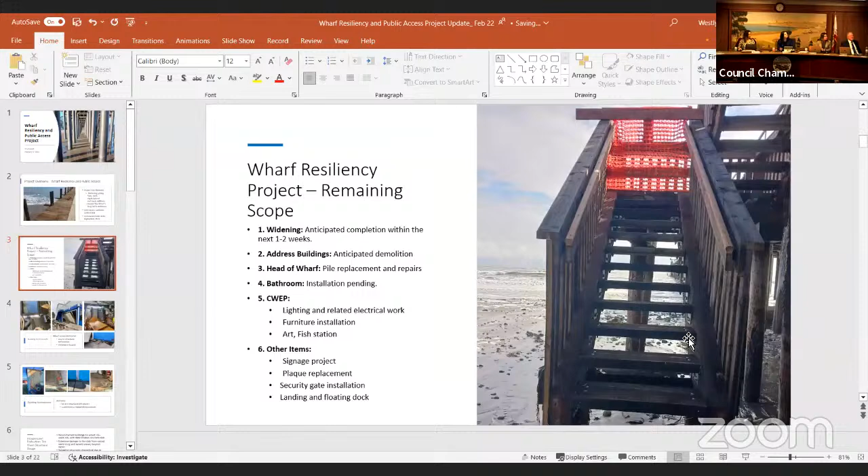Joys of technology. I'm sorry, no worries. Yeah, sorry. Okay. How do we get rid of the notes?

Okay, good evening, Mayor and Council members. Update on the Wharf Resiliency and Public Access Project post our community meeting yesterday. Next slide, please. If anyone needs a reminder, the key project elements of the Wharf Resiliency and Public Access Project is to widen the wharf to be more resilient, fix some deferred maintenance, add a restroom, ensure the wharf's long-term resilience, and to do repairs from the January, now December 2023 storms. Cushman Contracting has been on the job since September 2023 and is working diligently to complete this project within the calendar year. Slide.

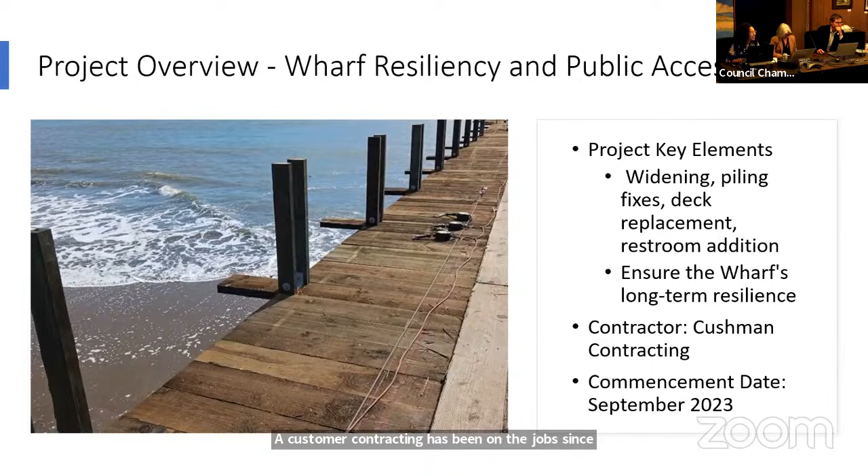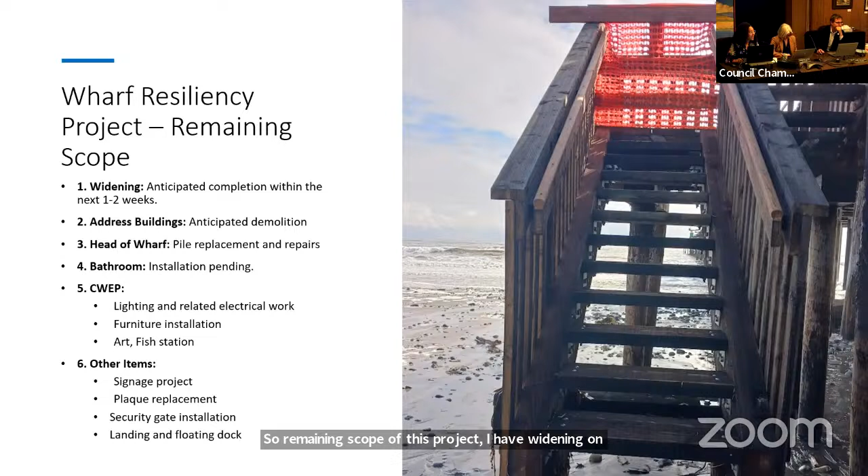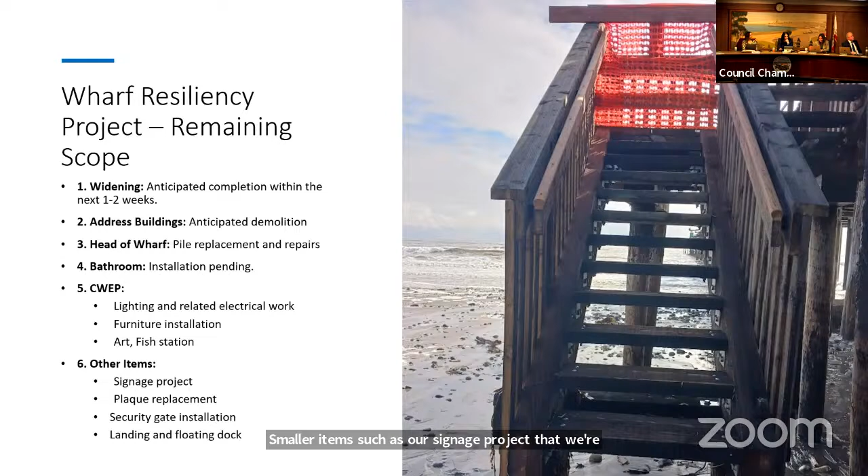So the remaining scope of this project includes widening, but actually I was informed that the widening was completed today, so that's one box to check off. The other remaining items in scope are to address the buildings, which is the bulk of our conversation this evening, but also to complete repairs to the head of the wharf, discuss the bathroom installation there, the Portland Loo, items from the Capitola Wharf Enhancement Project, and other smaller items such as our signage project, replacing plaques, putting in the security gate, and addressing the landing and floating docks.

As reported two weeks ago at council, the Wharf House restaurant has severe structural deficiencies, and we discussed how this building needed to be demolished because it's an imminent safety hazard.

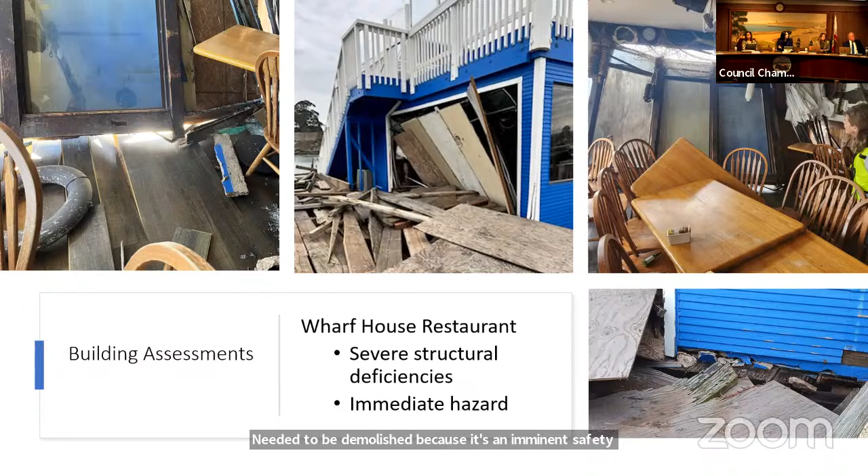What we did not discuss in detail two weeks ago, because we did not quite have the assessment completed, was the boat and bait shop, which also has severe structural deficiencies. That was assessed by myself and our building official, but also confirmed by an independent engineer at the port.

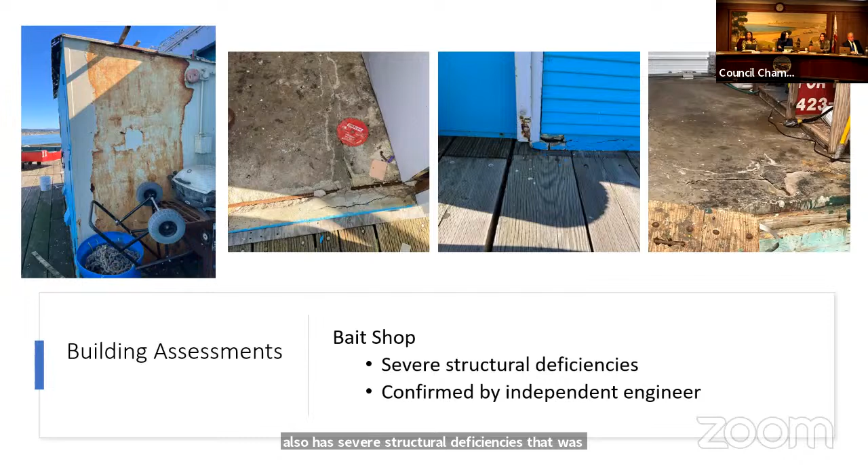Here are our findings. Mr. Tim Wann is in the audience this evening, and I'd like to invite him up to speak to these findings about these buildings.

Hello everyone, welcome, thank you for being here. Can everybody hear me? Okay. My name's Tim Wann, and I'm a registered civil engineer. I practice structural design independently, and I've been involved with the city of Capitola in terms of repairs on the Esplanade starting in the storms of 2008 and the more recent storms as well. So I've got some experience with wave action and damage, and trying to keep those structures serviceable.

I was asked to evaluate the boat and bait shop and take a general look at the structures out on the wharf. On the way out there, I noticed the wharf is coming together really well—it's looking great. That's an important element for any structure: having a good wharf supporting it.

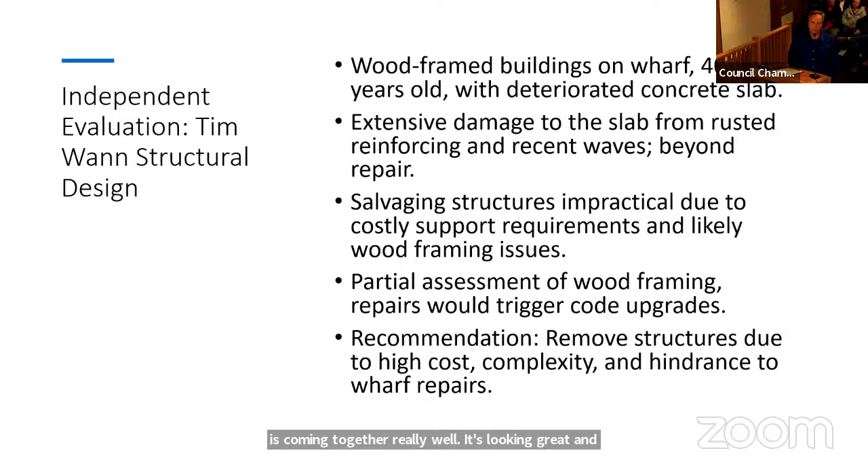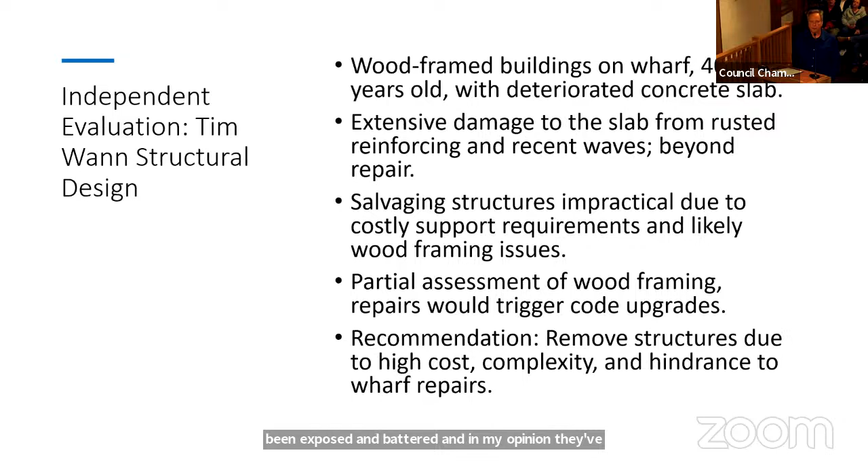Upon looking at the structures, they're roughly 40 years old, and they've stood the test of time, but they've been exposed and battered. In my opinion, they've reached the extent of their service life. What it would take to repair them would be more costly and cumbersome, and I think you'd be left with an inferior product at the end of the day, versus just moving forward and having better access to continue repairs on the wharf and starting a better structure on top of it.

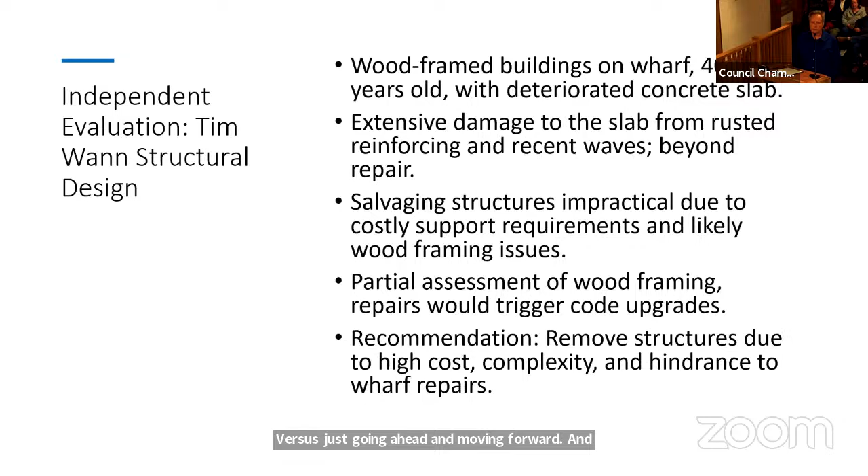Any questions at this point in the presentation? Or do you want to wait until the end? Okay, we'll wait until the end. Thank you so much.

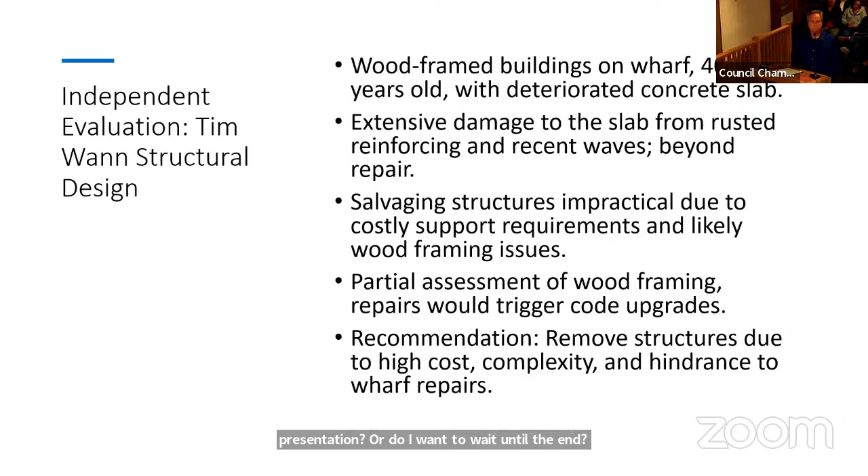As you know, yesterday we had a town hall that was very heavily attended. Some of the main takeaways were the support of the businesses and encouraging their tenancy out on the wharf, and also questions regarding the demolition of the buildings and the financial stability, disposition, and implications. So we're going to get into that in the next few slides.

One of the big questions that came up prior to the meeting, and at the meeting, was what are the chances we can preserve these buildings where they are now in the same structures? Really, that isn't feasible—they would need extensive repairs. Obviously the inside wall of the Wharf House is completely collapsed. For the boat and bait shop, the repair would involve lifting the building and working underneath it, and while that's feasible, it's not practical. We'd also have to address a bunch of compliance issues—there are hazardous materials concerns out there, so it's not really practical, and to Mr. Wann's point, it's not financially reasonable either.

So the demolition process is actually quite complicated due to the age of the buildings and where they're located. The first step would be to remove the contents. We're working with both tenants on this. For the Wharf House, it's not really safe to go into that building, so we're working on getting a third party to retrieve those items.

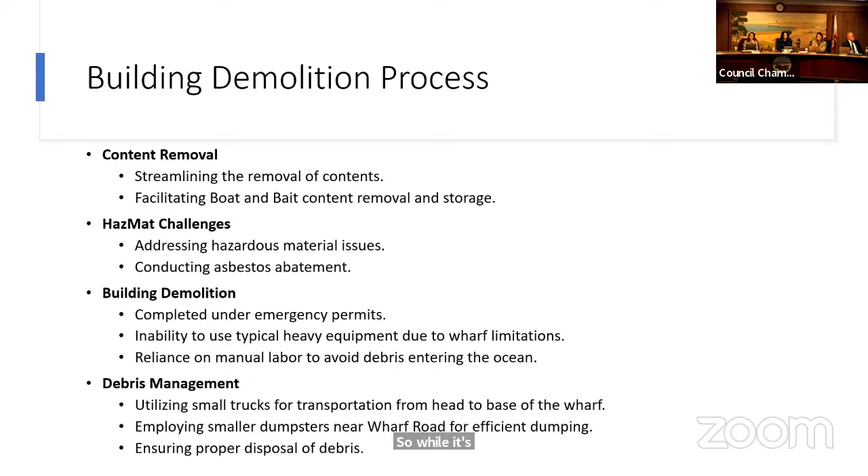Next slide, please. So there are a few different approaches we can take with this project. The first, recommended by staff, is to do this within the resiliency project. We're currently obtaining emergency permits, and we can do that because we intend on doing this in the short term. If you wait longer, you can't get them — you have to get regular permits.

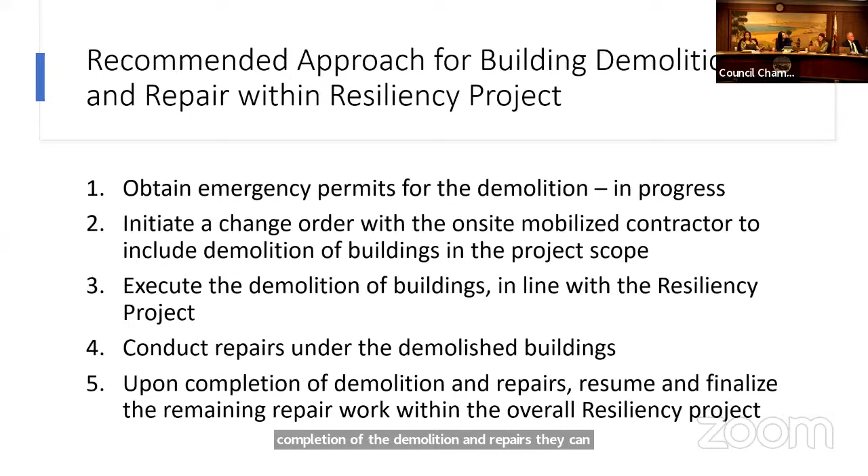The idea would be to initiate a change order with Cushman. They're on site, they're mobilized, they have the equipment and skills to do this type of work. They would execute the demolition of the buildings — demolition being all those steps we just discussed — and it'd be in line with the resiliency project. They'd be able to keep moving forward with other items already in their scope of work while doing this demolition. Upon completion of the demolition and repairs, they can resume full work and complete the overall resiliency project. The estimated additional time for that would be 6 to 8 weeks to the total resiliency project.

Next slide. So an alternative approach would be to engage another contractor within the resiliency project. This also has many steps — I can go over these in more detail if you'd like, but briefly, it would cease Cushman's work, which would incur costs. We owe Cushman under our contract for any delay in their work — we owe them money, which makes sense, since they still have their overhead. We would have to obtain new bids to cover all of the things included in that demolition list.

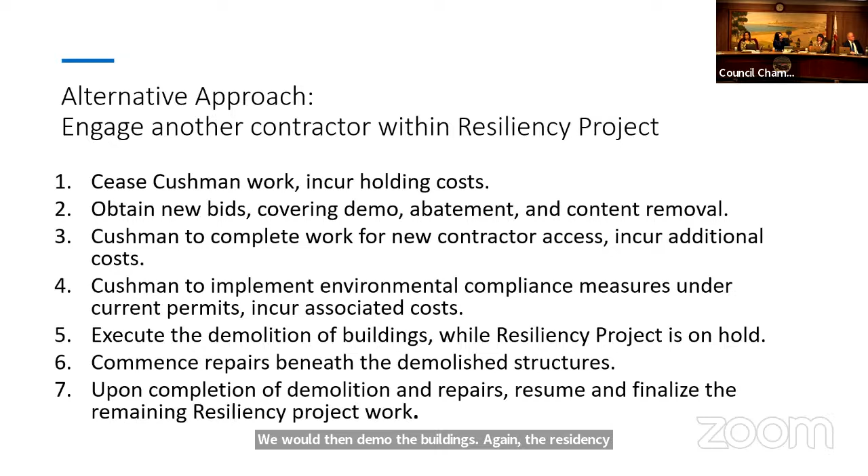Cushman would also be obligated to complete work so that the new contractor has access out to the buildings, which would also be at a cost. Cushman would also be on the hook for continuing to implement their environmental compliance, which we have with multiple permits on this project — also at a cost. We would then demo the buildings, and again, the resiliency project would be on hold. Then Cushman would come back, do the repairs under the buildings, and resume the project after that demolition.

Next slide. The third and least attractive approach would be to defer the demolition until the end of the project. What that really does is give us an incomplete resiliency project, because we would not be able to get to the head of the wharf, since that wharf house building is dangerous to work around. So they would have to stop the project short of the wharf house restaurant.

So what Cushman would need to do is shore up that building as much as they could, so it's not as much of an immediate hazard. Then, with partial completion of the project, they would demobilize, we would close out our contract with Cushman, and we'd need new engineered plans and new permits, because it's no longer considered an emergency since we shored up the building. We'd take it out to bid, mobilize a whole new contractor with a new contract, and work under our new permit conditions.

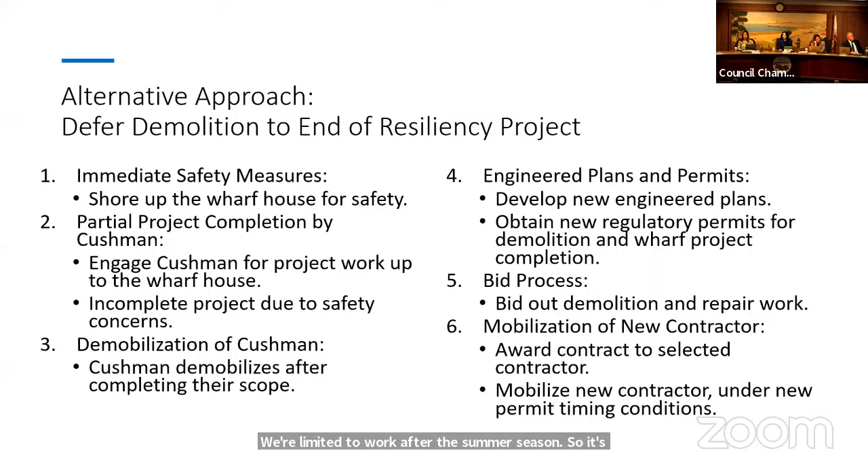And just as a reminder, when we originally permitted this project back before January 2023, we were limited to working after the summer season. So it's likely that we wouldn't be able to do this work until October if we went this route. Next slide, please.

Other parts of the wharf that need to be completed are head of wharf repairs. We had damage in January, again in December. We had always planned on replacing all of the decking, but there are additional piles and structural elements that were damaged in both the January and December storms. Also, the landing, which connects the floating dock back up to the wharf, has deteriorated significantly, which necessitates significant repair.

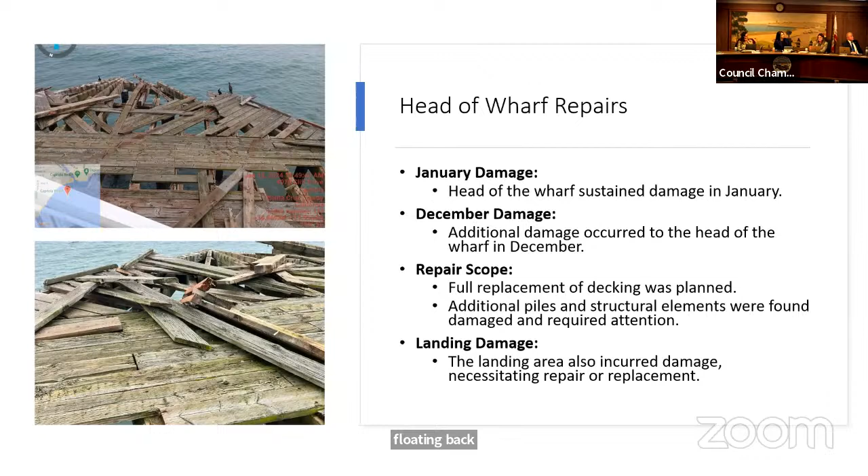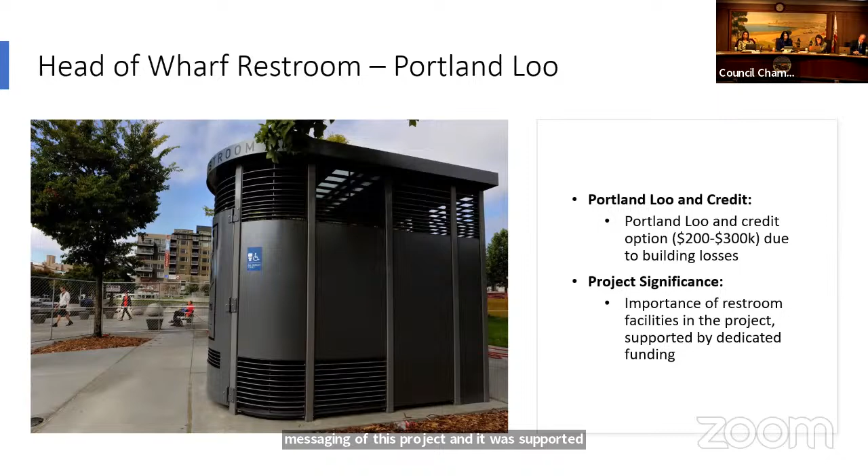Other items in Cushman's scope right now include installation of the Portland Loo. This is a small single-user restroom out on the head of the wharf. It was meant to be in between the two buildings. Assuming we demo these two buildings, it would become a floating restroom. There's a potential to get a credit for this if we do not install it, though it would not be the full credit for the bid item since there's a restocking fee from the manufacturer. There was also importance placed on providing these facilities throughout the messaging of this project, supported by dedicated funding which we could repurpose elsewhere, but it's something the community considered significant.

Other items to be completed are all those in the Capitola Wharf Enhancement Project. That project's specifics are scheduled for consideration by Planning Commission in March. Staff proposes integrating the electrical and furniture components into the Cushman contract because those are types of work they're already contracted to do. That's included in the change order proposed for your consideration tonight. Other elements, such as artistic elements and the fish station, are under separate development and not part of this conversation this evening.

Additional efforts, as I said before, we have a grant. I'm not sure we've talked about this in council, but we did get a grant from the Marine Sanctuary Foundation for educational signage, so we're starting that project. There's also plaque replacement, the floating dock, and the security gate that has been fabricated. All of those things still need to be completed by Cushman prior to the end of this project.

So, the money. This is our proposed change order. I wanted to start from the very beginning: we started off well below our estimated budget of $8.9 million. With these projects it's very common to have change orders, especially considering the storm damage from January, which was evaluated but couldn't be fully assessed until the decking was removed. The first three change orders were nothing out of the ordinary for a project of this size and scope. The fourth change order was for the storm damage from December of 2023. Our current contract stands at $8.3 million.

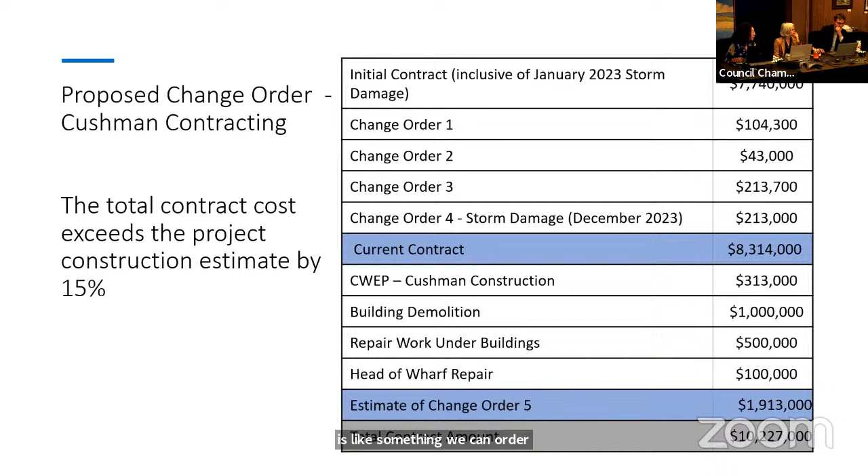They also have to be ordered. You have to schedule the delivery. You have to store them somewhere. You have to assemble them and install them. So that all comes at a cost that probably is not the best use of funds and time of our crew, and so that would be a separate contract that we would bid.

And that would definitely need to be a project that follows this resiliency project. I think in our last meeting when CWEP presented, they were clear that once the money came to us, we were going to be able to complete this project at council's discretion with some input from them. And hearing from staff, this seems like the most pragmatic approach to using the dollars at this time.

For tonight, I guess my last point is if we move forward with CWEP, Cushman Construction, repair work under the buildings and head of wharf repair, we can make that particular motion today and just table the building demolition to the special meeting on Tuesday. Does that sound right based off of what's on the agenda tonight?

Yes, I just think that would result in an additional change order for Cushman later, because we could do this change order for those items, but then with the demolition there would still be cost incurred either way, whether Cushman does it or we do an additional change. And it's just a few days. I guess that's just on Tuesday.

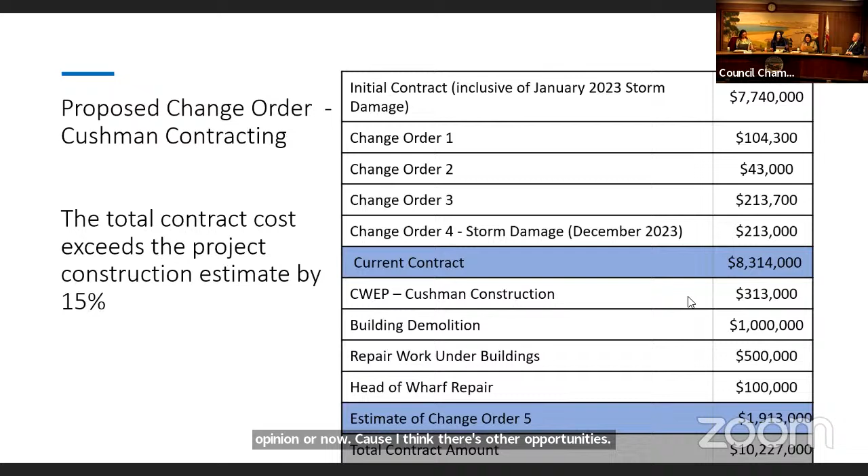I do think it's important that we prove to our community that we're doing our due diligence by getting additional bids. But I really don't want to hold up the opportunity for our business owners to work with the city and the community in finding ways to get some kind of temporary facility out there while we're continuing the long-term planning for facilities on the wharf. So Tuesday would be as long as I want to push it. If we can do a special meeting on Tuesday, I'm okay with that, and if we could just continue to try to get bids.

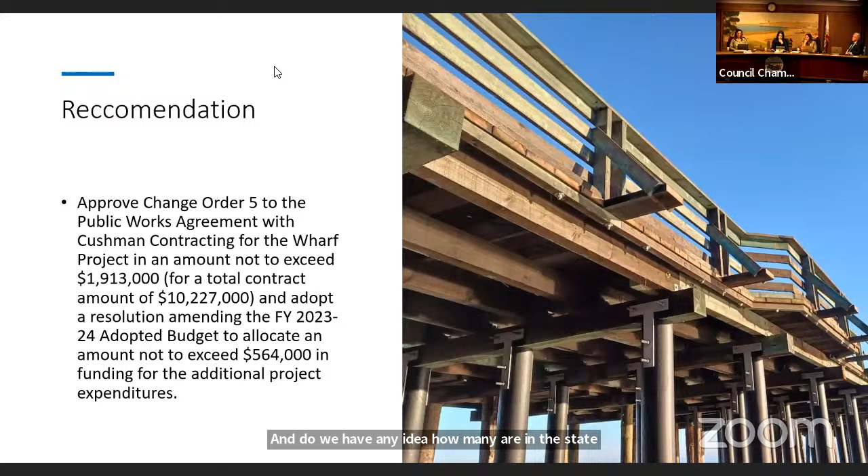I was just curious. I just want to point out, and while I'm speaking, sorry Austin, I was just about to ask you to pull up a slide. Will you pull up that slide that had the next step summary slide? It was for our deliberation. And in the meantime, I really want to take a moment to point out that grant we got for the educational signs, that our vice mayor fought very hard to get, and credit is due in that regard. That's the one, okay.

I am happy with moving forward with a special meeting on Tuesday to further consider any grants, to further consider any bids that were received, and to additionally consider the bid that we have from Cushman.

Council, if you're okay with it, let's save the rest of these items until Tuesday, including the bathroom item. I will say, if you are leaning towards not installing the bathroom, the sooner we let the manufacturer know, the better.

So then we'll start by entertaining a motion. City manager, just one detail I want the council to be aware of: our public works director has another public meeting that evening for the Cliff Drive project, so you'll be getting your city manager pretending to be a public works director, presenting the information. I trust her ability to train me on the right things to say.

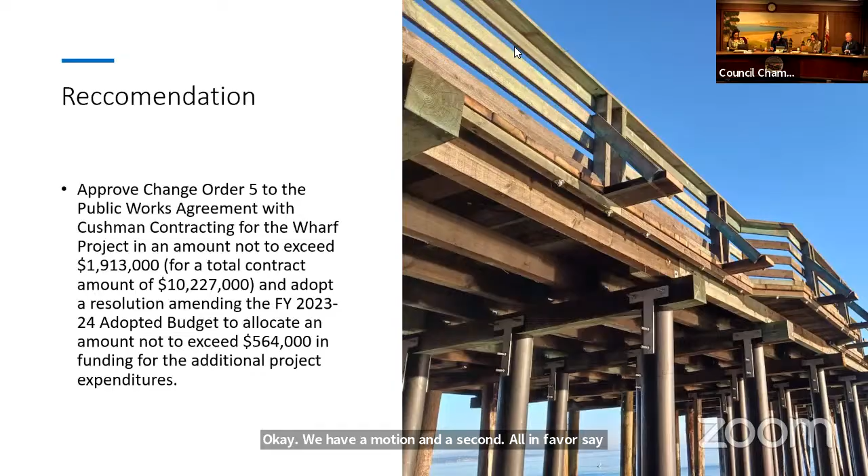We will move on to item 8B, Bay Avenue and Hill Street traffic safety update.

Hello again. I'll give the council a reminder of how we got here on this project. In September 2023, staff brought options for improvements to the Bay Hill intersection, which was one of the council's goals for the fiscal year. On November 29th, we held a community meeting regarding this intersection, and then council directed formation of an ad hoc subcommittee with Councilmember Clarke and Councilmember Pedersen to do directed outreach to the property owners of this corner and to the Bay Avenue senior housing. Over the past two months we've done that outreach, reconvened with the subcommittee, and drafted recommendations for a refined design. To go into the details of this project, we have Kimley Horn this evening, Derek Wu and Frederick Venter, who will give the presentation on what we've been up to.

Good evening, Mayor, members of City Council, everybody attending tonight's meeting. My name is Derek Wu, project engineer with the consulting firm Kimley Horn. Also in attendance from Kimley Horn is Frederick Venter. We're here to present our traffic analysis for the proposed safety improvements at Bay Avenue and Hill Street intersection.

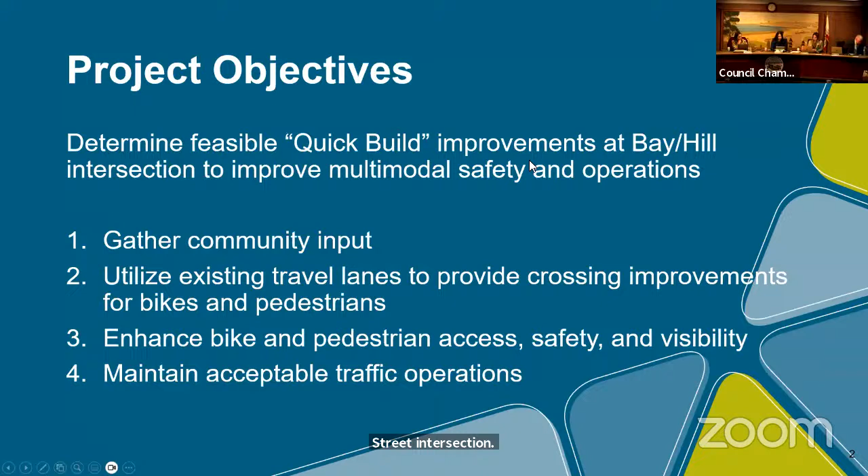The primary objective of the project was to determine feasible quick build improvements at the Bay Hill intersection to improve multimodal safety and operations. The traffic analysis that Kimley Horn and city staff conducted aimed to gather community input through public outreach, utilize existing travel lanes to provide crossing improvements for bikes and pedestrians, enhance bike and pedestrian access, safety, and visibility at the intersection, and maintain a balance to provide acceptable vehicle traffic operations through the corridor.

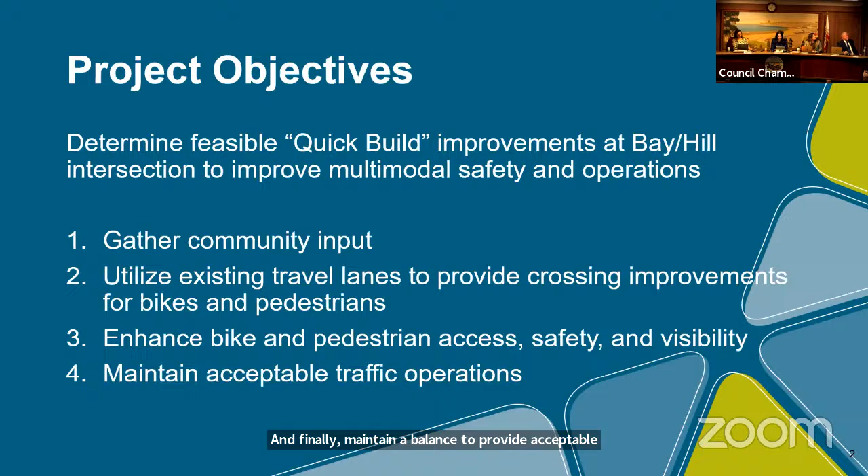To address these goals and objectives, we will present the existing conditions, review the various traffic calming measures to improve the intersection, summarize the outcome of the public outreach conducted, review the preferred quick build design alternatives, and finally discuss the next steps and council direction.

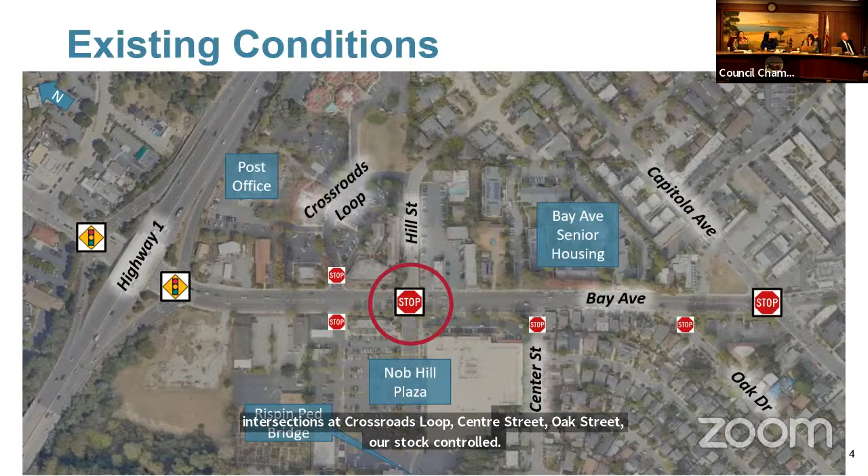This slide is an overview map showing the project study area and existing conditions. The Bay Hill intersection, circled in red, is currently an all-way stop controlled intersection providing direct access to the Nob Hill Shopping Center and the Rispin pedestrian bridge crossing Soquel Creek. Other major intersections nearby include the Highway 1 ramps and the Capitola Bay stop controlled intersection. The intersections at Crossroads Loop, Center Street, and Oak Drive are stop controlled on the minor approaches. The Bay Avenue Senior Housing Apartment Complex is also located nearby, and many active residents cross the Bay Hill intersection daily.

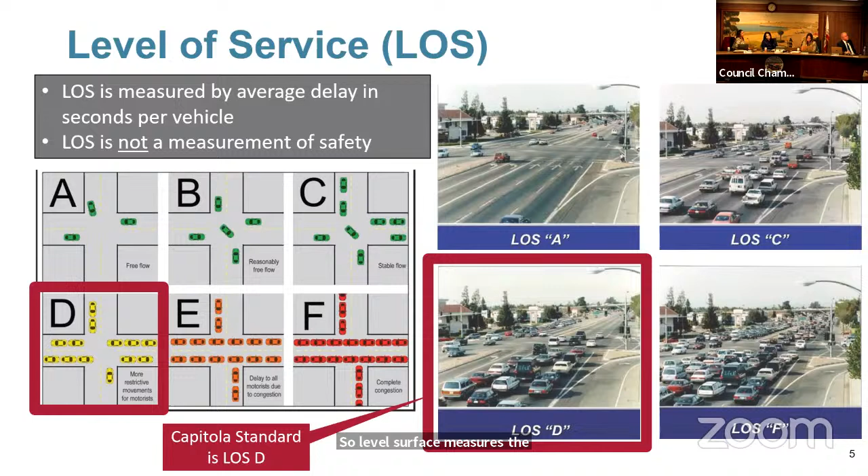In transportation engineering, one of the primary metrics analyzed is level of service, a term that describes the operating condition of an intersection using a ranking scale from A to F. The level of service standard along Bay Avenue is level service D, which represents conditions between stable traffic flow and complete vehicle congestion. Level of service measures the average intersection delay per vehicle, and it's important to note that level of service is not a measurement of safety.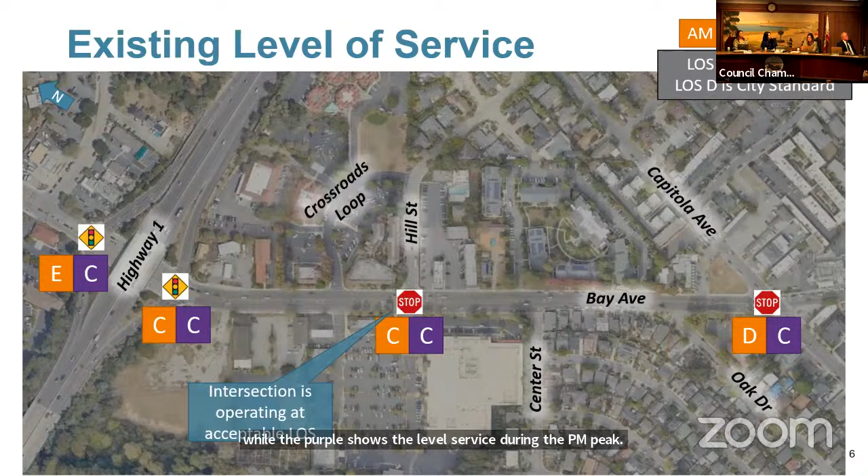The existing lane geometry at the Bay Hill intersection consists of 2 travel lanes in each direction along Bay Avenue with a center left turn lane. For the Nob Hill driveway, there are 2 inbound lanes and 2 outbound lanes. In the center of the road, there are 2 small raised medians that provide signage along the pedestrian crosswalk.

The multiple vehicle lanes at the intersection create multiple turn conflicts that drivers, bicyclists, and pedestrians need to watch out for when crossing. At night and during peak traffic, visibility to see all the potential conflicts is limited. In addition, the crossing distance on Bay Avenue is long, and pedestrians are exposed to up to 5 lanes of vehicle traffic. These challenges make it difficult to cross the intersection safely.

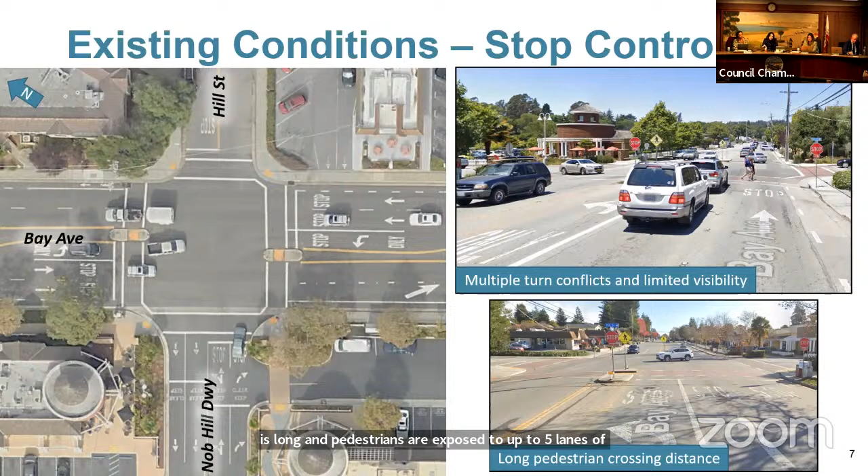The Bay Hill intersection currently has 9 vehicle entry lanes and over 41 conflict points, which is more than a typical stop-controlled intersection. The multiple vehicle lanes cause conflict points between vehicles, bikes, and pedestrians crossing the intersection, creating confusion about who has the right of way and who is next to cross. As a result, it causes a higher probability of accidents.

Although the intersection currently operates at an acceptable level of service for vehicle operations, there have been several accidents over the years caused by unsafe driving behavior. Between November 2017 and December 2023, there were approximately 12 total vehicle collisions at the Bay Hill intersection. 3 of the 12 accidents were pedestrian-related injuries, with the primary collision factor being cars failing to yield at the intersection. Other primary collision factors include unsafe speeds, improper turns, and not yielding to other cars on the road.

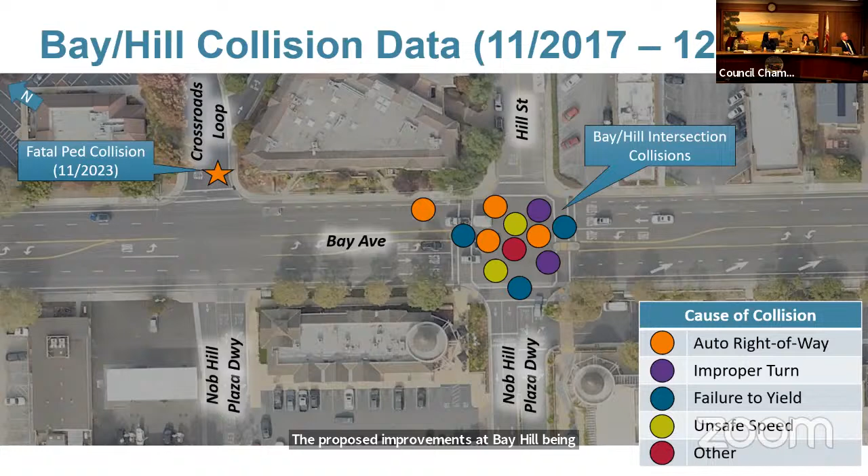Here's a graphic that shows where the different accidents took place at the Bay Hill intersection. The 3 pedestrian accidents occurred at the crosswalk at Bay Hill. Based on the collision data, there are potential safety concerns at this intersection. The proposed improvements at Bay Hill being presented tonight aim to enhance bike and pedestrian safety and reduce vehicle speeds through traffic calming.

The proposed improvements for the intersection are to implement curb extensions and a road diet as traffic calming measures. These features convert some of the vehicle travel way into a cross-section with fewer or narrower vehicle travel lanes. The reduced travel lanes are repurposed to allow space for additional pedestrian, bicycle, or transit improvements. The curb extension pushes the pedestrian refuge area into the street, and these can either be permanently hardscaped or temporarily striped with bollards or planters. Both the curb extension and road diet calming measures reduce vehicle speeds and shorten the crossing distance for pedestrians. The sharper turn radius and narrower road force vehicles to slow down, which improves pedestrian safety.

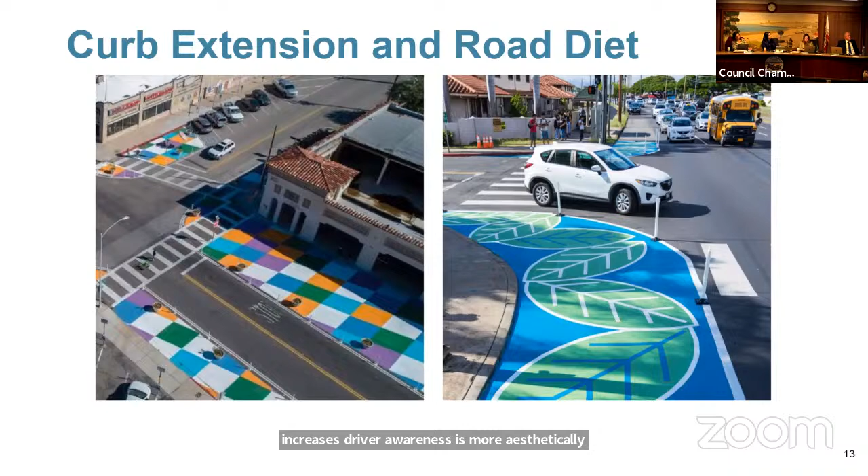In addition to curb extensions, separate striping and space to provide both bike and pedestrian crossings would also improve visibility and access at the intersection. The photo on the left is a striping example in downtown San Jose, and the photo on the right is the current crosswalk striping by the Capitola Library at Wharf and Clares.

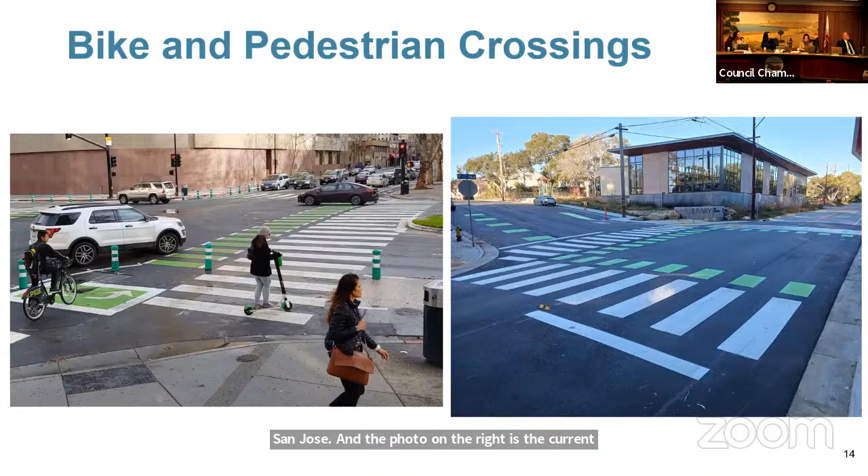Another way to improve visibility is upgrading the existing signs with flashing LED lights. These signs are solar or battery powered, and the lights on the outside border flash throughout the day to alert drivers of upcoming traffic control. It should be noted that in January, the city installed LED flashing stop signs at the Bay Hill intersection.

In the past few months, Kimley Horn and city staff conducted public outreach with the local community to gather feedback on the intersection and propose quick build options. The design team held subcommittee meetings with several council members and outreach meetings with adjacent property owners. On January 31st, the team also held a public workshop at the Bay Avenue Senior Housing Community to address the needs and concerns of residents who live near and travel through this intersection. City staff also communicated with representatives from the RTC Elderly and Disabled Transportation Advisory Committee.

From the various public outreach meetings, here is a summary of general comments and feedback from the community. The community is supportive of the quick build project and the various traffic calming measures to improve bike and pedestrian safety at the intersection. The community supports a solution that does not significantly impede access to neighboring properties, and one that does not significantly impact vehicle operations.

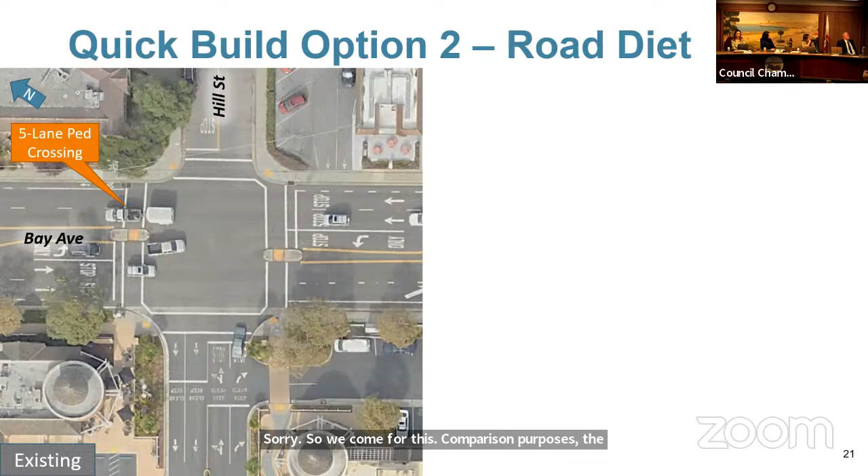For comparison purposes, the image on the left is the existing lane geometry at the Bay Hill intersection, and the image on the right is the proposed option 2 improvements.

With this option, the existing class 2 bike lanes on Bay Avenue would be augmented with a striped buffer to provide greater separation between the vehicle travelway, and would be enhanced with green bike striping within the intersection. The existing raised medians and the crosswalk would remain. At the Nob Hill driveway, vehicle lanes are narrowed and reconfigured to have 1 entry lane and 2 exit lanes to shorten the crosswalk distance and reduce the number of conflict points at the intersection. At each intersection corner, the roadway width would be reduced with decorative paint and delineated with flexible bollards at the edges to slow the turning speed of vehicles and enhance bike and pedestrian visibility at the crossings.

This proposed cross-section would essentially shorten the pedestrian crosswalk distance from 5 lanes to 3 lanes, so peds are less exposed to oncoming traffic compared to the existing condition. For the quick build option 2, implementing the road diet features would provide the greatest improvement to bike and ped safety compared to the other options. The trade-off for this option, however, is that reducing the vehicle travel lanes with the road diet would result in greater impacts to vehicle level of service and longer vehicle queues.

A traffic analysis for the quick build options was conducted to compare the level of service and queues. The level of service reported is the average intersection delay for vehicles, and the vehicle queue reported is the 95th percentile measured in number of cars.

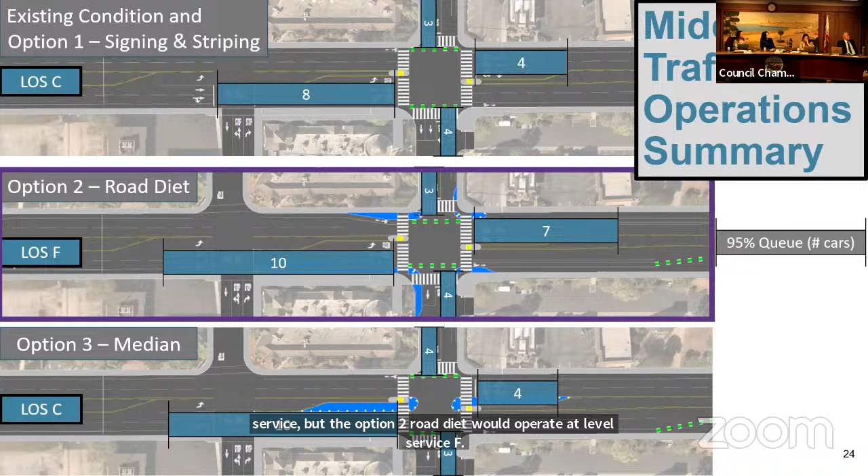And finally, during the evening commute, the level of service for option 2 road diet would operate at level of service D, and the vehicle queues are expected to increase again by about 1 to 2 vehicle car lengths.

This summary table compares the existing intersection condition and the different quick build options that were analyzed. Each option was evaluated based on these criteria: bike and ped safety and visibility, pedestrian crossing exposure, intersection level of service, and impact to vehicle queues. For the existing condition, there is low bike and ped safety and visibility since the intersection has a very high total of 41 conflict points and peds are exposed to 5 lanes of traffic when crossing Bay Avenue. However, the existing intersection is operating at acceptable level of service and vehicle queue lengths are generally low.

For option 1, adding signing and striping improvements would only provide minor improvement to the bike and ped visibility within the intersection. However, the number of conflict points and the ped crossing exposure to traffic would not improve compared to what is out there today. This option would not impact or change the existing traffic operations for vehicles.

For the preferred option 2, implementing the road diet features would provide the greatest improvement to bike and ped safety and visibility, since the number of conflict points would be reduced and the ped crossing exposure would be reduced to 3 lanes of traffic with the curb extensions. The trade-off, as mentioned earlier, is that reduction in lanes will increase vehicle level of service delay and provide longer queues along Bay Avenue. For option 3, implementing the median features would provide some level of improvement to bike and ped safety and reduce a few conflict points. However, this option does not have the same level of safety improvement as option 2.

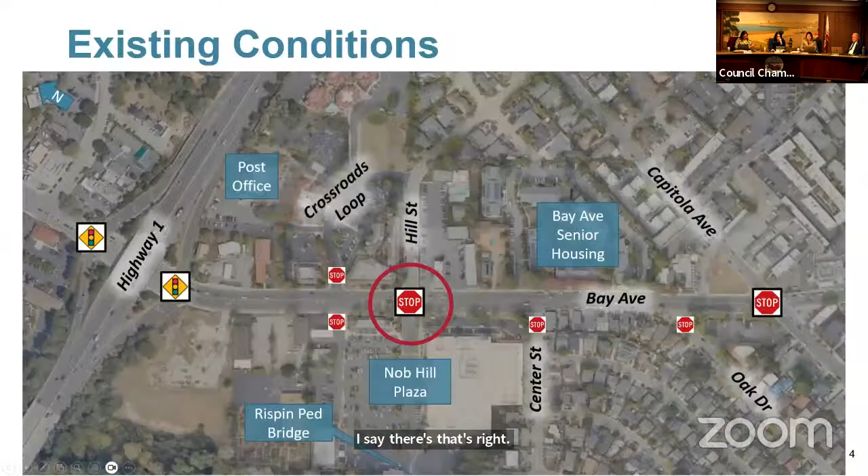And in all of the options - this is more for staff - regarding the property owners around, because these are pretty significant changes, and I know we had community input, but I'm curious what the residents, the property owners, the senior centers thought specifically about any of these. Did they have direct input?

Sure, yes they absolutely did. I will also say Kimley-Horn was also part of all of those conversations as well. We had significant conversations with both the Lomac and Red Tree properties, definitely the Red Tree properties, which is the Nob Hill Shopping Center, because it most affects their property. We had long discussions about the right turn into their entrance by the car wash, about their egress from their center, and we made modifications based on those comments. I'll say the opposite - the Crossroads Loop property had fewer comments on this particular intersection, but did have concerns about cut-through traffic on their property and things they could do to limit that. And then the property with the Dairy Queen, we also spoke with that property owner, and she was considering potential modifications to her parking area to make it flow better at that intersection.

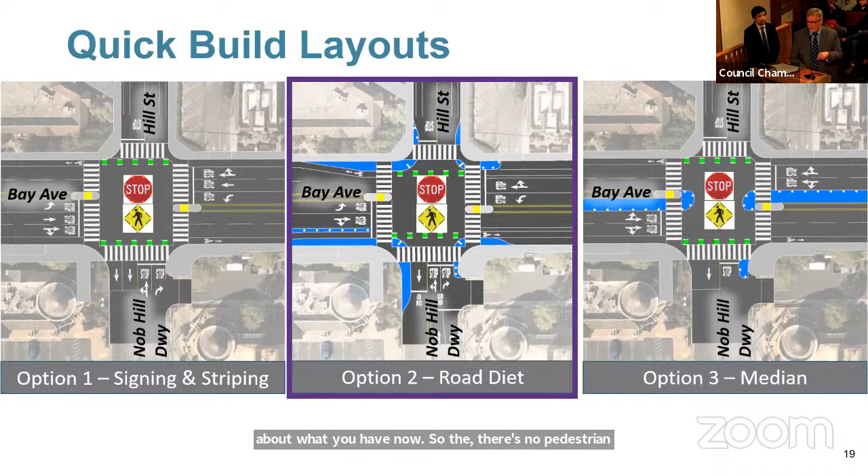In the original options 1, 2, and 3, is it safe to assume we already did option 1 with the signage, or is this different signage at this point? Because we put in blinky signs. There's some additional signage and striping over and above what you have now. So there's no pedestrian warning flashing beacon, the little yellow one, and also I don't believe there's actually green bike crossing striping either.

And then can you move to the slide with the 32 points - there's, keep going, there's, oh, back one. Yep.

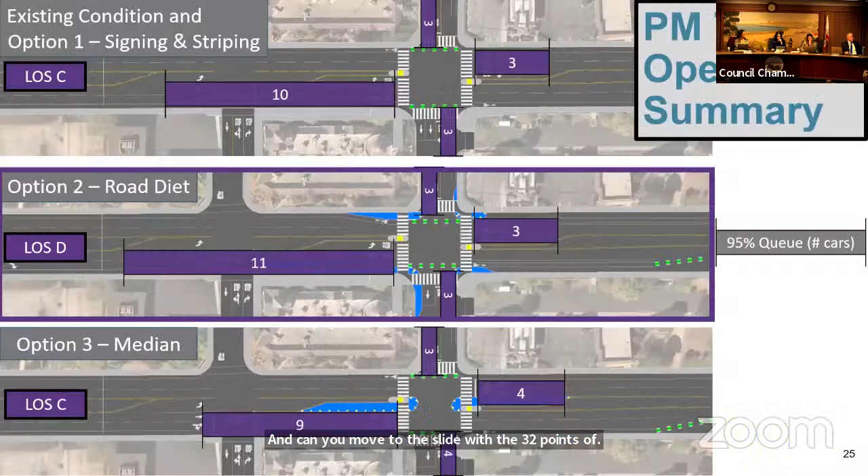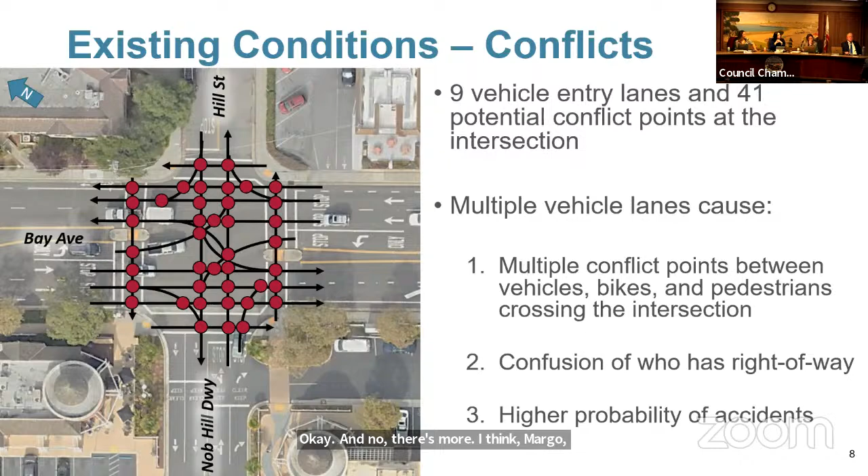Almost, I don't know, I'm lost, I don't know where it is. Okay, there's more, I think Margo, you're on it. What page number is that? Page 26.

Thank you. So in regards to option 2, the road diet, the preferred option, the 32 points of conflict. When we brought this to staff, my highest concern, and I think the rest of the council's, was safety. Looking at this, is 32 points of conflict the best we can do? You mentioned that we didn't have enough funding for lights. A lot of our community's basic request was just blinky lights and better lighting, which seemed really simple. This is an extreme version of it. So my question is, if we added more lights, would those 32 conflict points reduce?

No, it would not. Lighting would enhance visibility of people crossing, vehicles, or bicycles, but a conflict point is where the movement of any mode of transport crosses another. A car crosses a pedestrian path, a car crosses a bicycle path, a bike crosses a pedestrian path. Basically anybody that will cross lines in their movement is a potential conflict point, and if there's an accident, it will happen at one of those points.

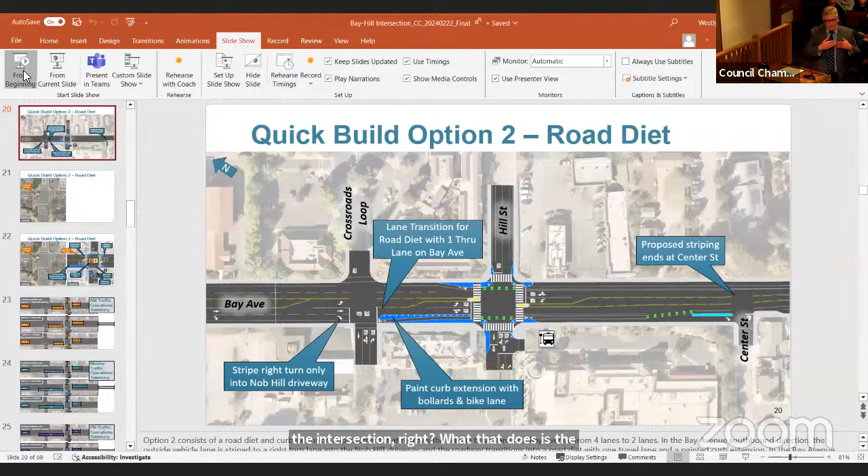The other big benefit is - I wonder if we can bring the image up again - we are pushing the pedestrian walk, the bulbs, into the intersection. What that does is the pedestrian is now stepping sort of into the street, if you think about it. It's not really stepping into the street, but they're moving out of that sidewalk position so they can see cars better and cars can see them better.

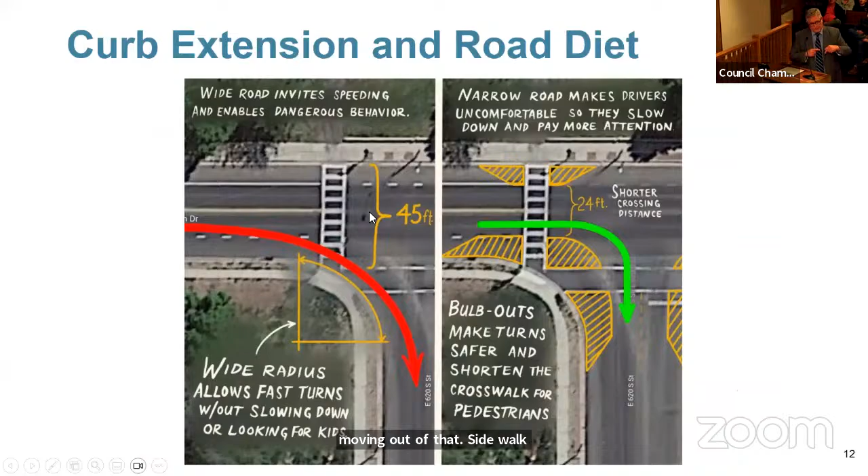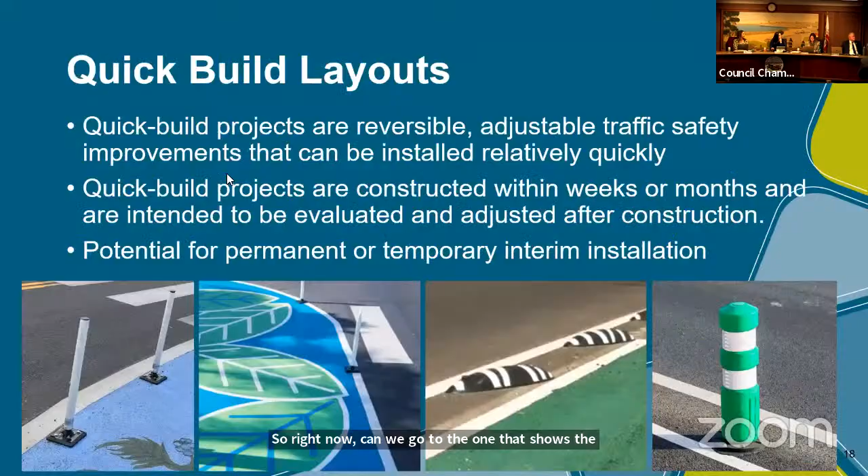Can we go to the one that shows the existing and the proposed side by side? There we go. So a pedestrian is standing, let's say across from Peet's, and heading towards Crossroads Shopping Center. I'm standing behind on the left corner there, the bottom left corner. If you look at where the pedestrian will stand, they'll probably stand where the blue is - so they're stepping off the curb and into the street. So you have far better sight of the pedestrian, and the pedestrian will have better sight of vehicles as well.

The recommendation in the staff report is to consult with the chair of the Art and Cultural Commission. Knowing that we want this to be a quick build and have this installed quickly, it might be a little prohibitive to have a whole hearing about it with the Art and Cultural Commission. That is also an option.

Okay, thank you. Those are all my questions.

So just for comments, this came to us because of safety reasons, and my priority is ensuring the safety of our community members, pedestrians, and bicyclists. I think the community's priorities may vary through this process, especially as we see an increase of traffic, and we'll have to be prepared for that feedback. But for me it's making safety the priority, and I appreciate the information brought to us today. I liked our speakers' comments on the study and analysis.

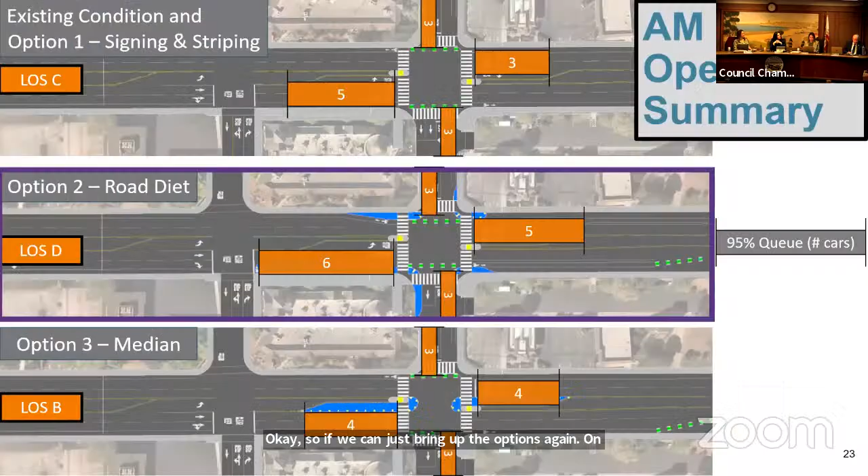Okay. I mean, you used the word off the cuff, so I know staff doesn't like that, but sometimes we do when we need to problem solve. Okay, so if we can just bring up the options again on the screen. I don't know what slide it is. Yeah, there we go.

I'm happy to make a motion with option 2, the road diet, as presented by Kimley-Horn this evening and staff. And then also I'd like for staff to look into ordering the lighting in the meantime, to help alleviate some of at least my concerns and what we heard from the community. I will second that. All right, we have a motion and a second.

For sake of discussion, I have a couple comments or questions as well. Can you bring back the picture again that we just had up? Yeah, that one, thank you. It looks like the green bike striping doesn't continue into the other side of the intersection. Is that the case? Is there going to be any kind of... because we've got paint and bollards on the side of the intersection leading away from the freeway, and then by the time you get through, we don't have that anymore. Is that correct?

So the intent of the green striping here is to indicate a conflict area between bikes and vehicles, and that's what those little green blocks do. Once you reach the bike lane on the other side, we have the bike symbol and you're in a bike lane, so we don't have the conflicts anymore. That's why that specific striping is only in the intersection. Right, but before it we have the blue and the bollards, correct? Yep, and we don't have that after that.

What, you just came to watch? Oh yeah, doing good. I had some technical difficulties in the beginning, which I felt a little red in the face about, but it's fine. Julia texted me right away, she's like, 'We should have had you.' Not really.

Good evening, I'm Dan Schaaf with Schaaf and Wheeler, here to present the Zone 5 Drainage Master Plan. A little history: Schaaf and Wheeler did Zone 5 and Zone 6 master plans back around 2015, but the city of Capitola did not participate, so this is new data for the city. In the next about 10 minutes I'll talk about the team and the project, how we did things, what we discovered, what we recommend, and where to go from there.

It's a fairly large team because we're taking on more than just the capacity of the pipes and streams. We're also looking at operations and maintenance procedures for Zone 5, the county areas, and the city, and looking at the condition of the infrastructure, which is important since a lot of it is underground and out of sight, out of mind. We spent a lot of time on the current condition of pipes, culverts, and channels, and funding is also a big key, so we have two financial firms involved — a very large team.

So how did we do this? Can you actually move this? Is there a way to move it?

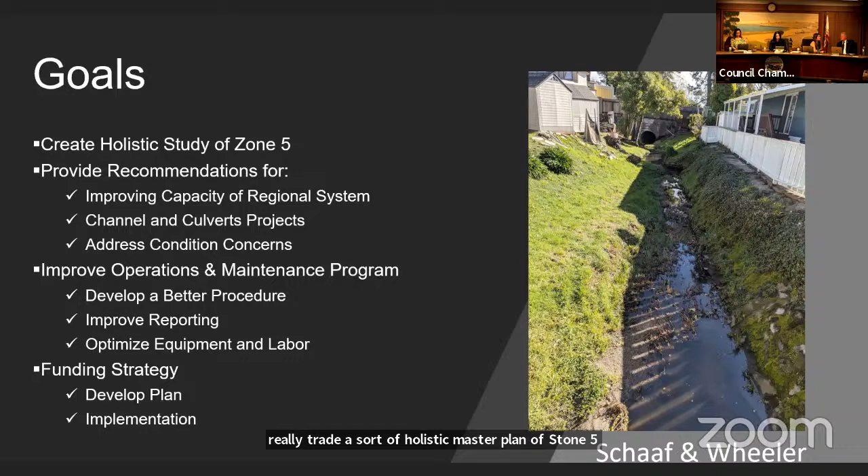So what are the goals? The goals are really to create a sort of holistic master plan of Zone 5, and that includes the city of Capitola.

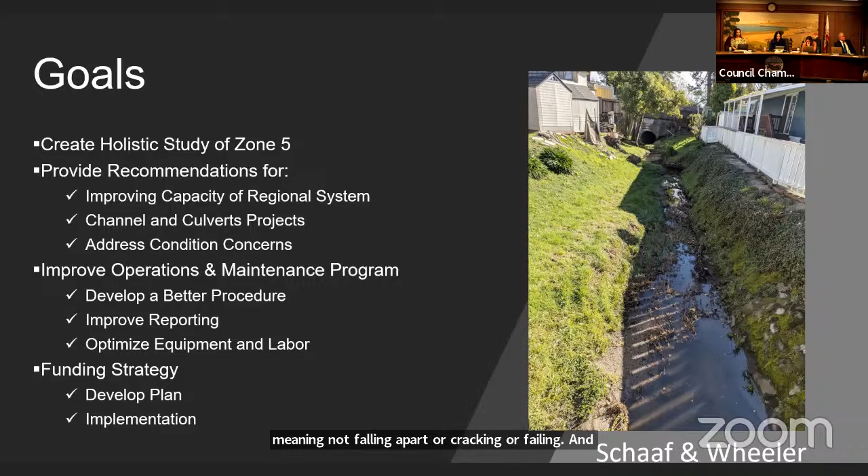We also want to provide information on the capacity of the system. We want to make sure it's safe during large storm events, that the infrastructure is reliable, meaning not falling apart or cracking or failing, and that maintenance crews are doing their work the most efficient way possible with the funds given.

How do we do that? Well, for capacity, we looked at two things: a 25-year storm for all the pipes in the regional system, the larger pipes within the county and Capitola, and then a 100-year event, like a FEMA type floodplain, in the channels and culverts.

For condition, we spent a lot of time with robotic camera CCTV, taking photos and video of the pipe to see what's going on. A lot of topside work too, just opening manholes, looking at how things were, if there's sediment or cracks or those types of things.

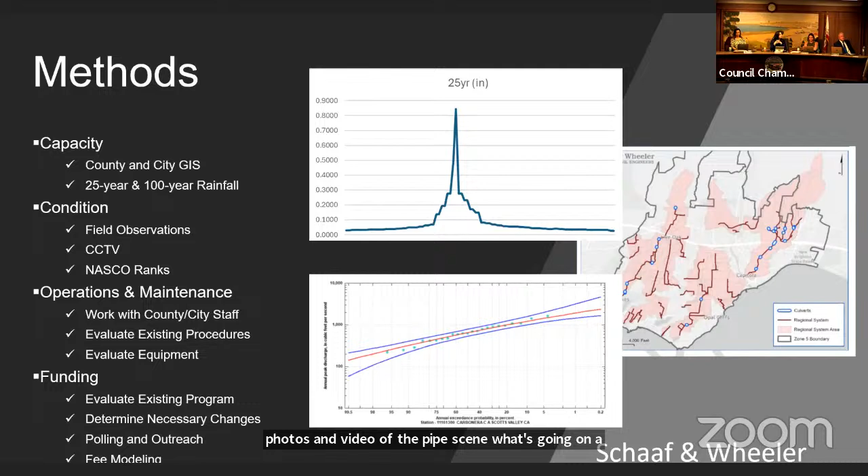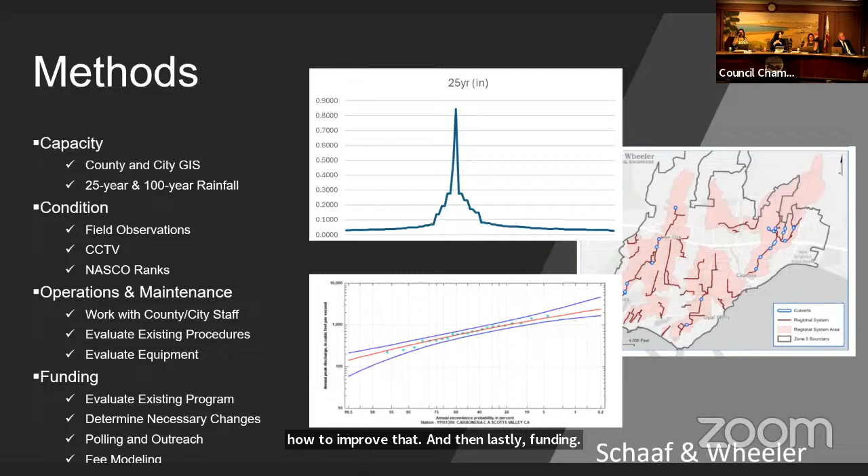And then operations—a lot of time was spent with the actual operations staff seeing how they work, and that forms the plan for how to improve that. And then lastly, funding: how is this going to be paid for, how is it currently being paid for, and how do we move from there?

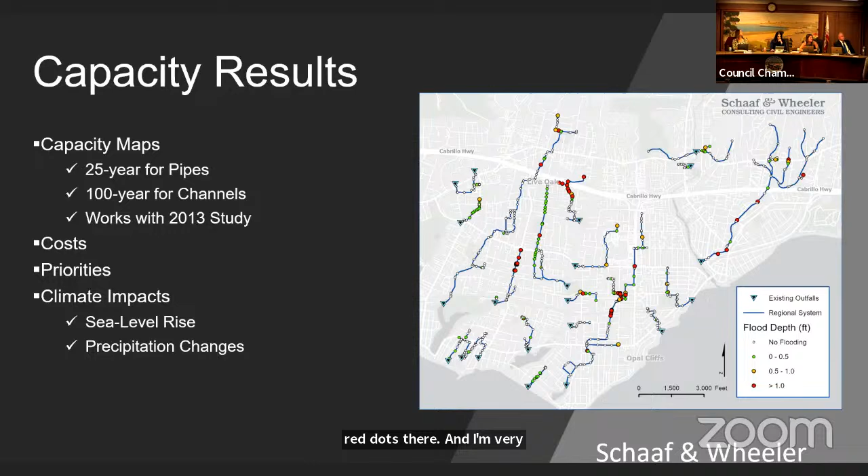So a little bit of the results. You all know where Capitola is, but what we're looking at here is the pipes for the 25-year event. When we see red, to us as engineers, it means the capacity of the system is limited. In Capitola, there's not a whole lot of what we're calling regional pipes—a lot of it's smaller infrastructure—but we do see some red dots close to here, on the kind of extension of Noble Gulch, before it gets into Soquel Creek.

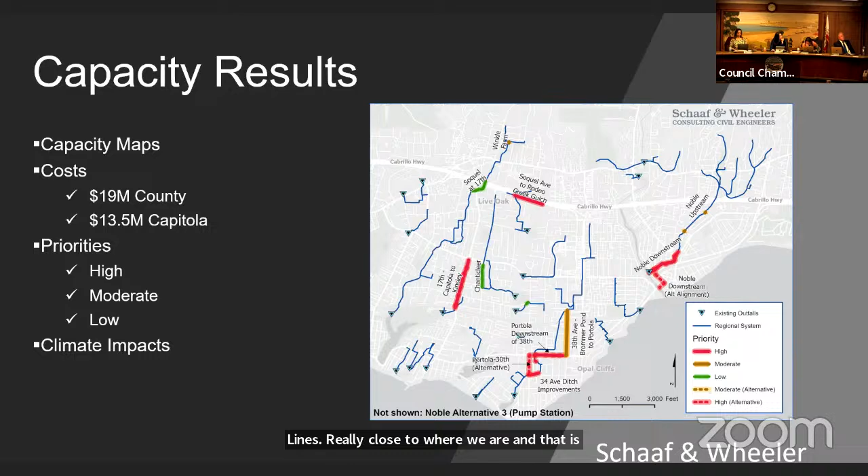And then we made recommendations. This is the entirety of Zone 5, but if you look at Capitola, there's quite a significant amount of red lines really close to where we are, and that's to make the improvement of getting water into Soquel Creek from Noble Gulch.

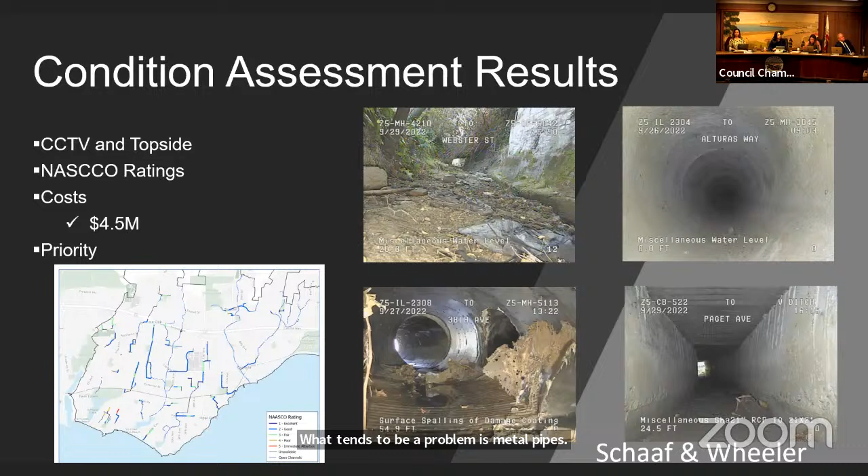Okay, so maintenance. This was a huge undertaking, and we did not look at this in 2013, but we really wanted to look at the system and how things were being operated currently, and then how that could be improved. Just ballpark figures, about $2 million is being spent on operations currently, and about $1 million is needed for NPDES. So there's about $3 million in needs to keep this system running throughout the entirety of Zone 5, not just the city of Capitola. We looked at the needs of how many people it's going to take and what kind of equipment it takes.

It's very reactionary right now—there's a problem, let's fix it, let's go maintain it. The new system is really to be proactive, so use data to figure out almost before it happens—we can predict where things are going to happen. That happens through tracking of data, getting the current staff trained to learn to use these tools.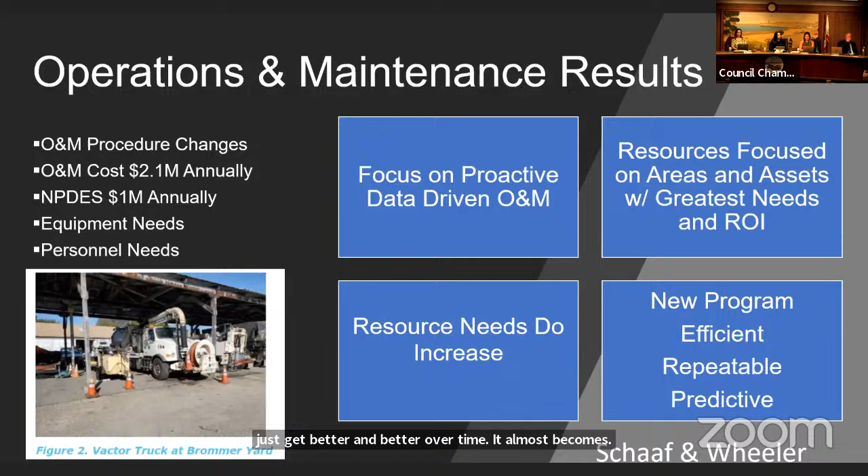Some of these things don't cost money; some of them do, like more equipment or more people. But focusing the resources that are available—we don't know exactly what resources there will be, but focusing them on the areas with the greatest return on investment is a really important thing. This system will just get better and better over time; it almost becomes repeatable and predictive. That's really a big change from being reactionary.

So real quickly, for those who don't know, there are lots of funding mechanisms. Stormwater is not a utility in California; in the rest of the Western states it is.

It's much more difficult to have a rate or a fee for storm drainage, so there are different ways to fund it. Starting with the general fund, just pay as you go on these projects. Impact fees, so any kind of development that has an impact would pay for their direct impact. Those are the simpler ones, but then we get into property taxes, property-related fees, and assessments, and those require votes of either property owners or the public.

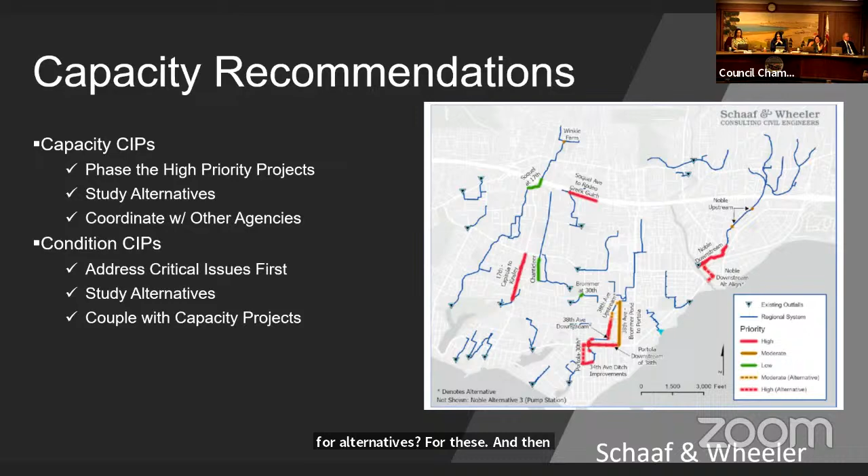On the operations side, I presented what the ultimate project could be, but it can be phased based on funding. If more new equipment and new staff aren't readily funded, current staff can certainly do a better job of recording information, creating a database of locations of where things happen, so that we're starting to gain that knowledge so we can predict where issues are going to happen and maybe do something about those conditions.

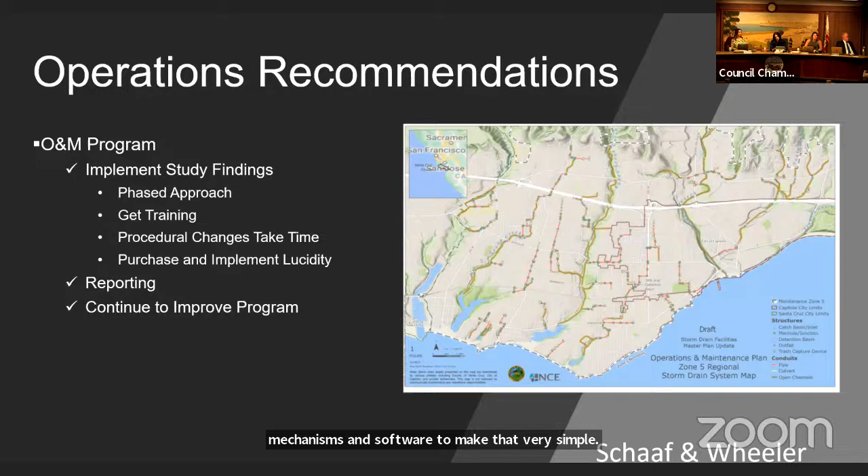If you're going out to one location 20 times a year, maybe it's cheaper to actually fix that location. So reporting is really the key to that, and there's mechanisms and software to make that very simple. It's not sitting at a desk for hours and hours writing reports.

After all the engineering, funding is where it really comes down to. I mentioned some of the mechanisms, but what's the process? This is sort of where we are right now: we're involving the city and county staff and telling them what we know about the system and what needs to be done.

And figuring out as a group what are the best mechanisms to use, because it may be more than one. And reaching out to the public, because ultimately the public, either property owners or the voters, are going to approve this. So they're the key to all this happening.

We just did this last week. We worked and figured out who really are the large stakeholders in this, who a fee could potentially be based on impervious surface. So large landowners would have a bigger bill than a single family resident, so they become important stakeholders. Schools have a lot of impervious surface, so these become very important people to talk to, to see what they're thinking.

On almost all these storm drain fees, the ones that have passed in California have almost always had a champion, someone outside the government who really believes in this. And sometimes it's not the message, it's the messenger. Sometimes if it comes from a blue ribbon committee or someone else, that can really have more weight, and people might listen to the same message differently.

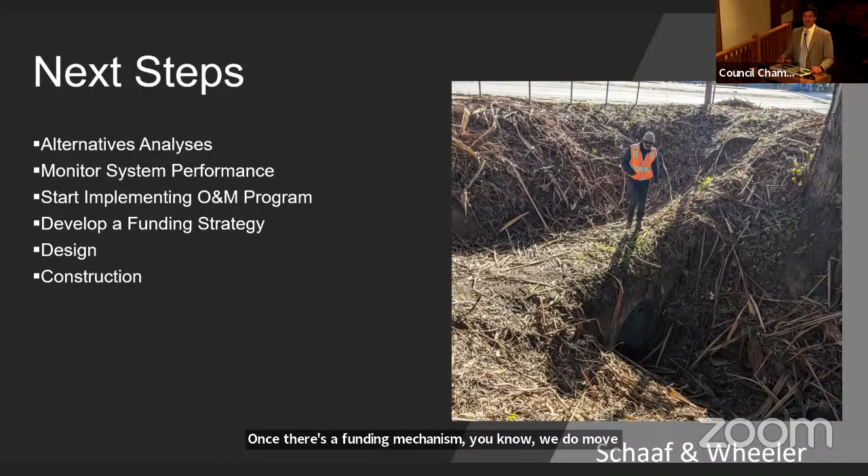Yeah, and I keep mentioning the O&M program. There's things in that program that can happen without any additional cost, and I think that's really a good start, and that's going to move towards a better system being maintained and more efficiently, and actually optimizing funds being spent for operations and maintenance. Once there's a funding mechanism, we move into design, and hopefully we have really good designs that the public likes and is aware of.

And we can move into construction and improve these conditions. So that's sort of it. Feel free to ask questions.

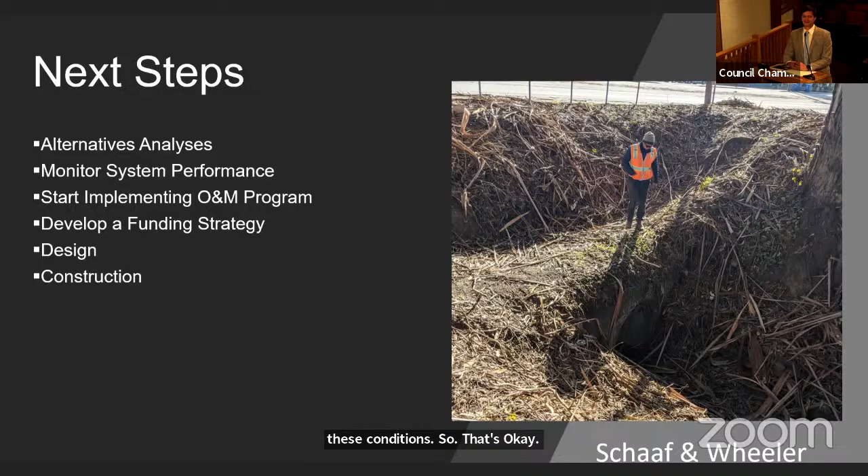Thank you so much for that presentation. Do we have any questions? No questions? Any questions? No? All right, thank you so much for your presentation. Do we have any public comment on this item? Matt, anything? No? Okay, closing public comment. Thank you so much, we appreciate you being here and sharing that with us tonight.

As mentioned, we are moving item 8D, the special events and park regulations, to the next scheduled meeting. So we're going to move on to item 8E, which is our 23-24 mid-year budget report.

Oh, no one heard your joke. All right, so our next item this evening is the year 23-24 mid-year budget report. You missed the joke. It's done now, it's too late. The moment has passed.

Killed it. So just as a summary, our general fund balance summary update: currently we still have about $400,000 that we have earmarked for city council goals from the prior fiscal year that we're still working on. In the next slide I'll go through those. We also have $100,000 set aside for the employee down payment assistance program and $954,000 for future capital improvement projects.